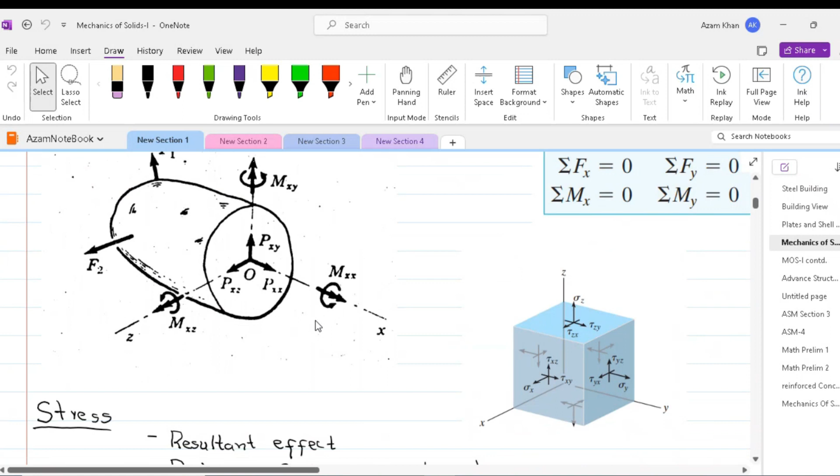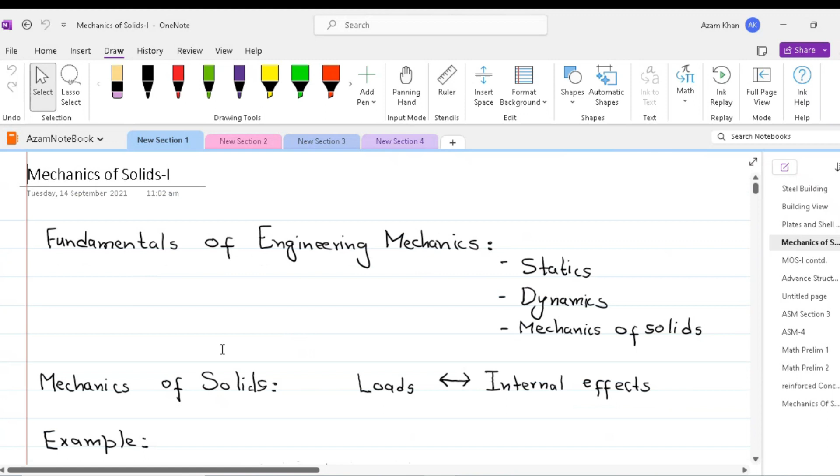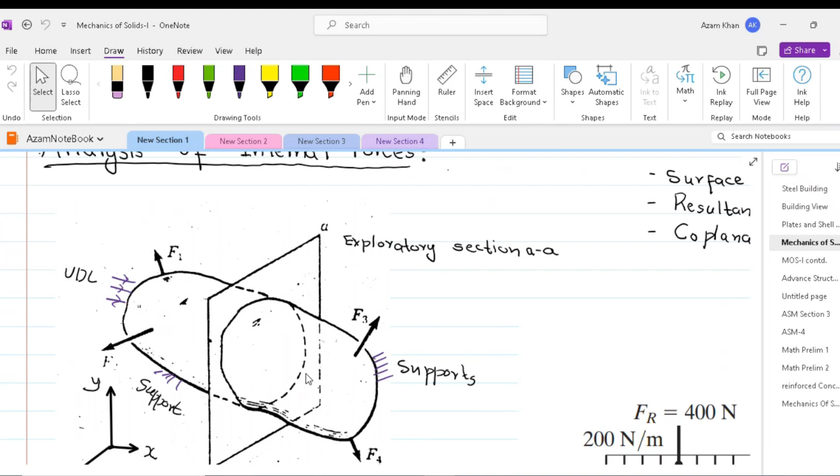In our previous course of Mechanics of Solid 1, we considered a body subject to different types of loading, supported at certain positions with a variety of loads applied. The basic aim was to find the internal behavior of the structure under a single type of loading at a time. In other words, we were trying to find the stresses and strains within a body when subjected to, say, axial load only, torsion load only, or flexure load only.

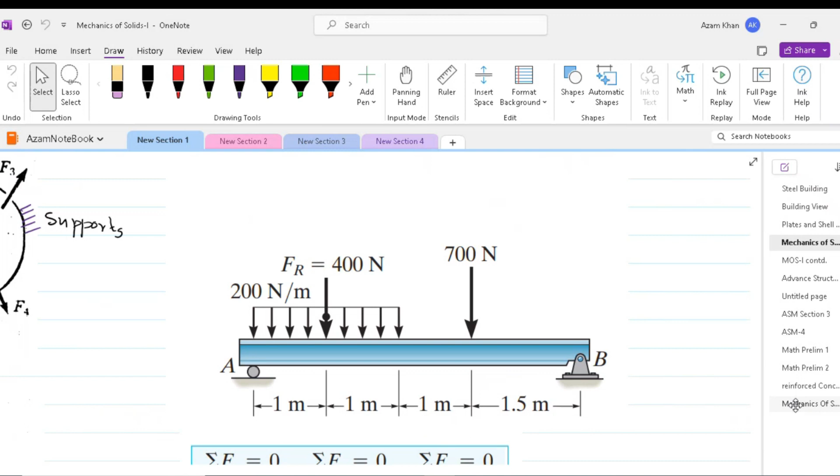In the combined stresses case, we will take a combination of these forces, apply them on a body, and try to find out the stresses. It's important to bear in mind that the stress and strain in our course will be considered elastic, so in Mechanics of Solid 2 we won't exceed the elastic limit.

In combined stresses, we can have two or more types of loading acting simultaneously on a structure. There can be three possible combinations of these loadings: axial and flexural, axial and torsional, and torsional and flexural.

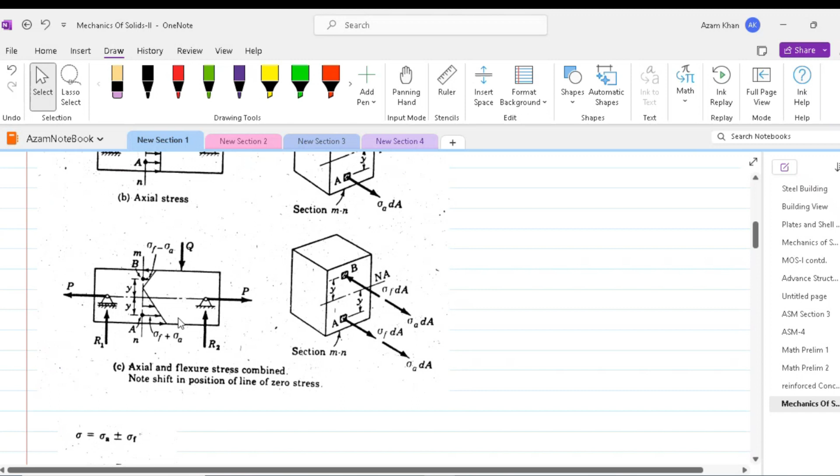Imagine we have a beam subject to flexural load and axial load at the same time. Because of the flexural load, applied perpendicular to the neutral axis, flexural stresses develop in the structure. Due to the simultaneously applied axial load, axial stresses also develop within the structure. In this figure, for convenience, the loads are shown separately, but in reality they act simultaneously on the structure, so the load is broken down into the flexure case and the axial case.

Imagine point A located at some distance from the neutral axis. We are trying to find the effect of both flexure and axial forces at this point, in other words, the stress at point A. It's important to remember that the internal behavior of a structure relates to finding the stresses and strains within it.

At point A, located at distance y from the neutral axis, flexure stress develops, given by sigma f times dA, where dA is the small infinitesimal area at point A. The force developed at point A is tensile, because the region below the neutral axis is under tension. Sigma f would be equal to my over I.

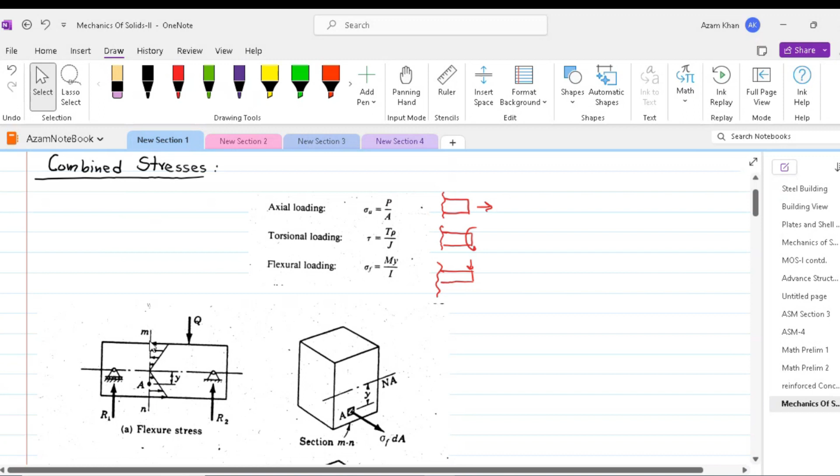The moment for this condition is found by drawing the bending moment diagram and finding the moment at A. This moment varies linearly along the cross section MN, where A is located at distance y. Sigma F, the flexure stress, is the stress at cross section MN. That stress multiplied by the small area around point A gives the tensile force appearing at point A. Similarly, due to the axial forces, axial stress develops at cross section MN.

This axial stress will again be multiplied with dA, and we would find the force at point A due to this axial stress. After finding the force contribution of flexure and axial stress, we can algebraically sum the forces to find the resultant force at point A.

The fact that we can simply add the flexure effect and the axial effect is because we are applying the principle of superposition. This principle tells us that we can linearly add the forces appearing in a particular direction, provided the system is elastic, or in other words, the elastic limit is not surpassed.

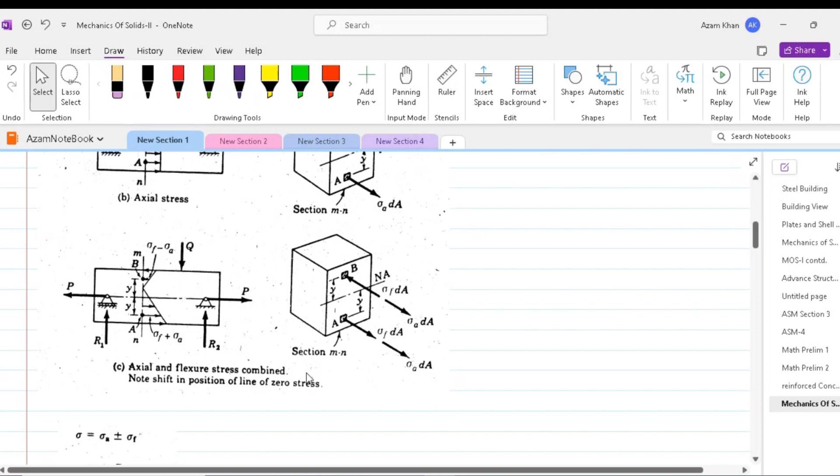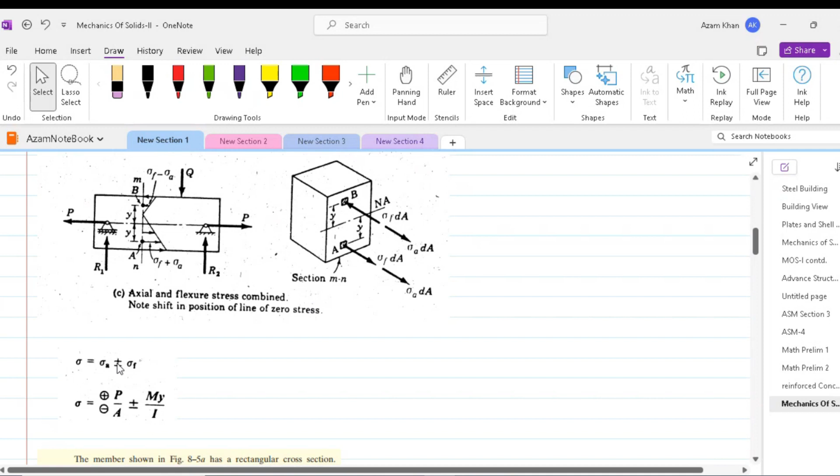Thus, we can write the total stress at any point along the cross section equal to the axial stress contribution plus or minus the flexure stress contribution. So in combined stresses, we have to be very careful about the signs of the load.

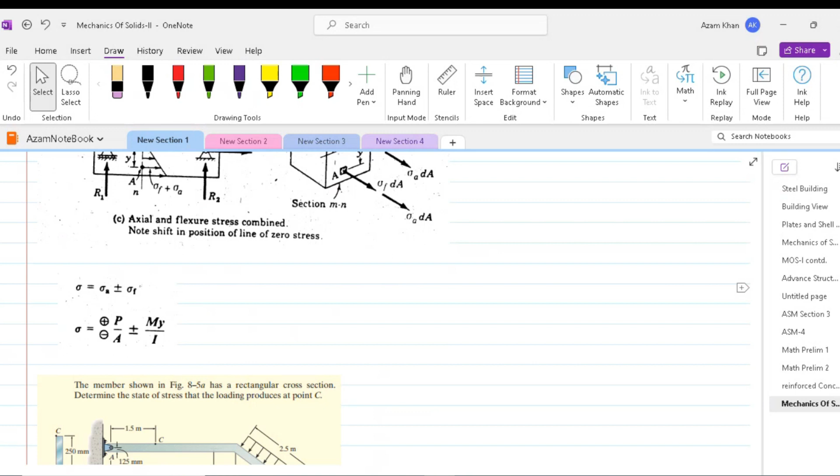If tensile stress is denoted by a positive sign and compressive stress by a negative sign, the resultant stress at any point of the beam would be plus or minus P over A, plus or minus My over I. The reason we have plus or minus P over A with the first term is whether the applied axial load is tension or compression.

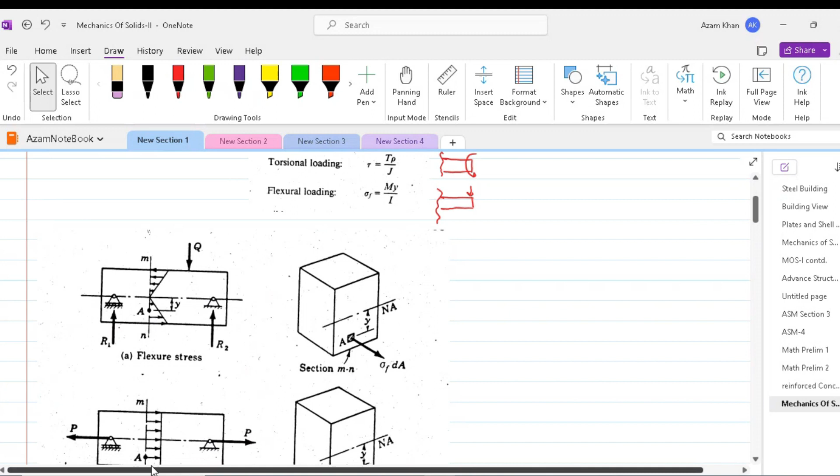The reason we have plus or minus with the flexure term My over I is whether we are below or above the neutral axis. In other words, if the load P and the load due to flexure stresses are in the same direction, the algebraic sum would be positive. However, if they are in opposite directions, we would have a negative sign.

Thus, the circling of these signs is a reminder that the axial stress is uniform and of the same type all over the cross section, whereas the magnitude of the flexure stress varies with position. In the same manner, if we have axial and torsional combined load, torsional and flexural combined load, or axial, torsional, and flexural combined load, we have to apply the same concept as discussed here.

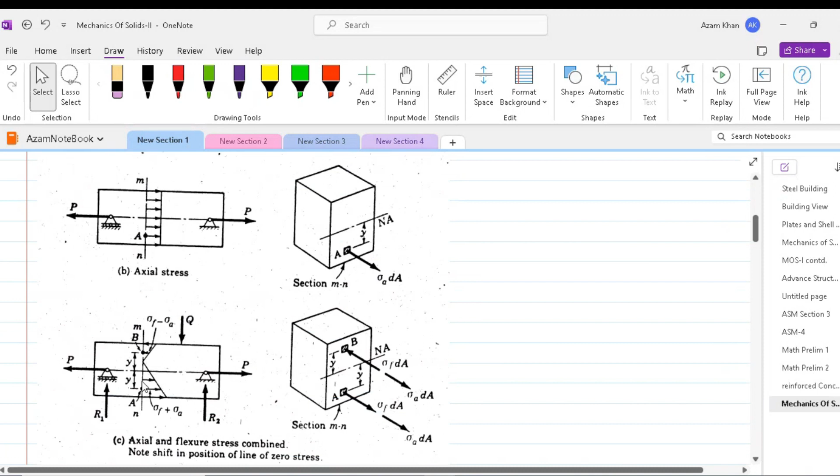We have to make sure whether the forces due to different types of loading are getting added or subtracted. So we will discuss a few examples now to make this concept a bit more clear.

In this problem, we have a member with a straight portion and an oblique portion. The oblique portion is subjected to a load of 50 kilonewton per meter and is 2.5 meters long. The straight portion is 4 meters without any loading. We are asked to find the state of stress at point C.

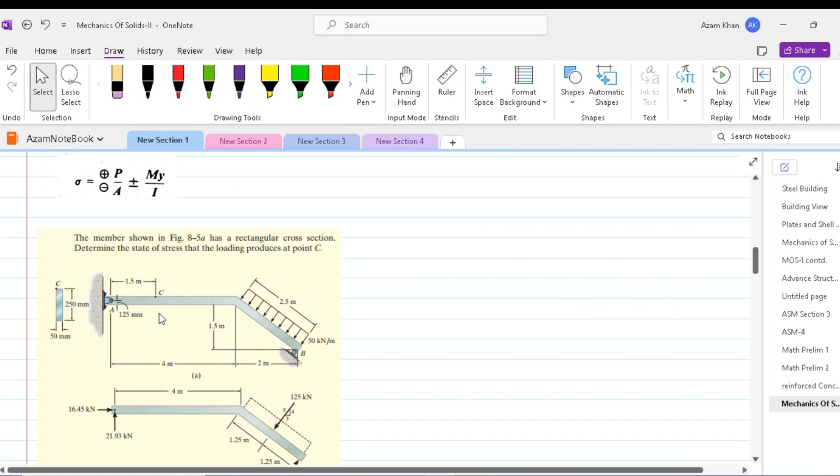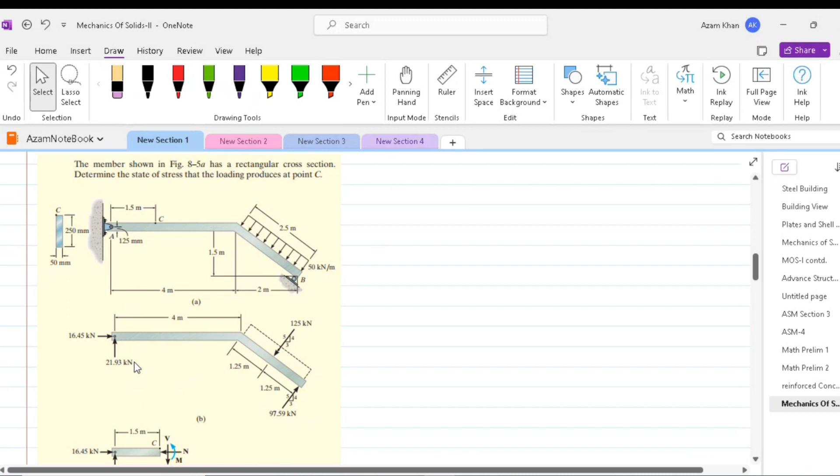As discussed previously, we first have to find the reactions at A and B. Please note that at A we have a hinge connection, and at B we have a roller connection whose resisting force is perpendicular to the longitudinal axis of the oblique member. Now, using equilibrium, we will get these reactions.

So at B, we get 97.59 kilonewton. At A, we get 21.93 kilonewton acting vertically and 16.45 kilonewton acting horizontally.

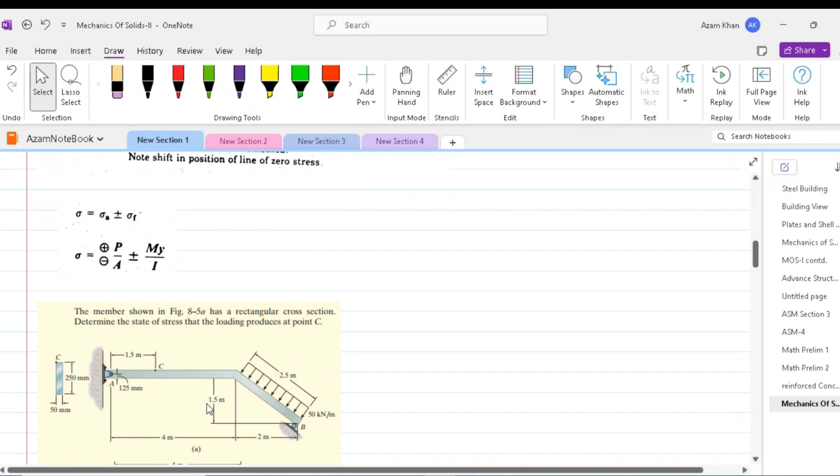In order to find the internal forces at C, we can cut the structure at C, put all the internal effect of the other side, and omit the other side. So the portion of the member on the right hand side will apply shear load V, axial load N, and flexure moment M onto point C. The equilibrium states that the summation of Fx, summation of Fy, and summation of moment of this free body must be equal to zero.

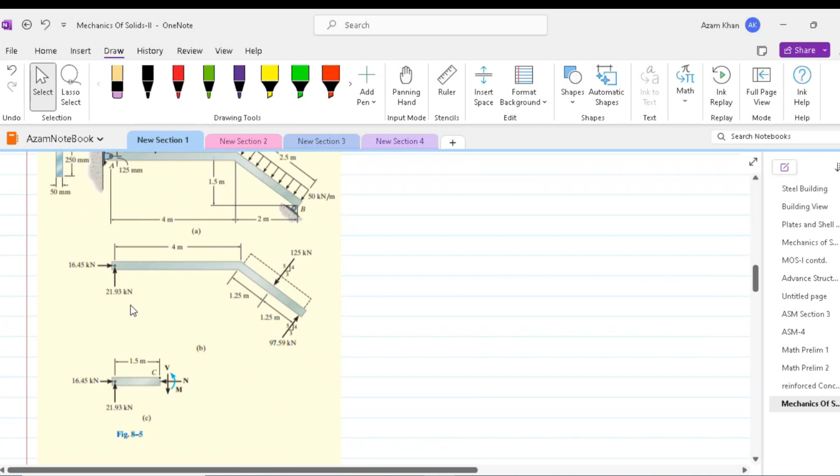Thus, we would get N is equal to 16.45 kilonewton, V is equal to 21.93 kilonewton, and M is equal to 32.89 kilonewton meter. So the normal stress would be determined by dividing this normal force by the area of the cross section, which is already given to us, that is 50 by 250 millimeter.

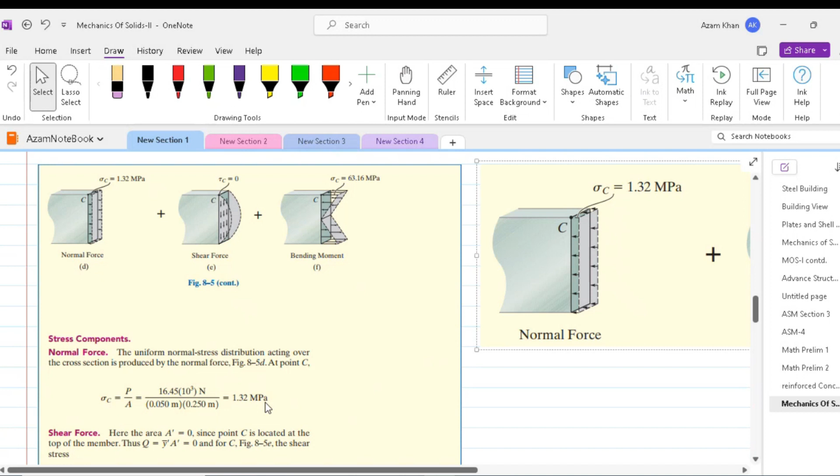So the axial stress will come out to be 1.32 megapascal, which is compression. The shear stress at this cross section will be equal to VQ by IB.

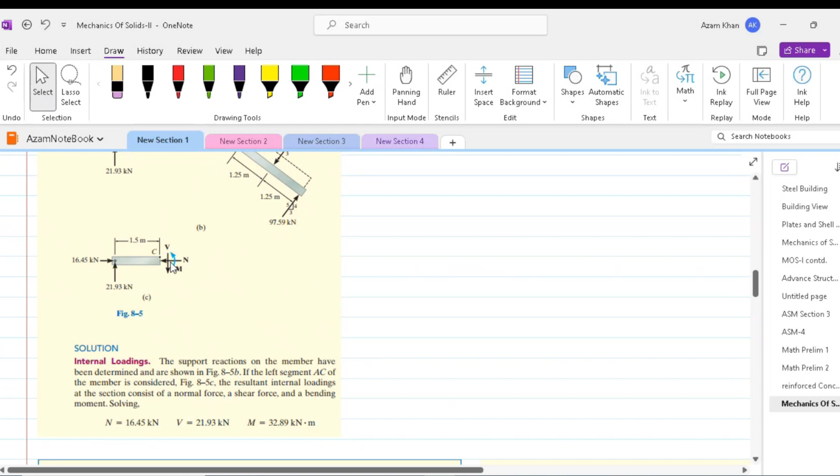However, since we are asked to find the stress at point C, which is located at the top of this member, at this position, the shear is 0. We know from our knowledge of mechanics of solids that the shear at the ends are 0, and then it starts increasing, becomes maximum at the center, then starts reducing and comes again to 0 at the lower end. So shear at point C is equal to 0.

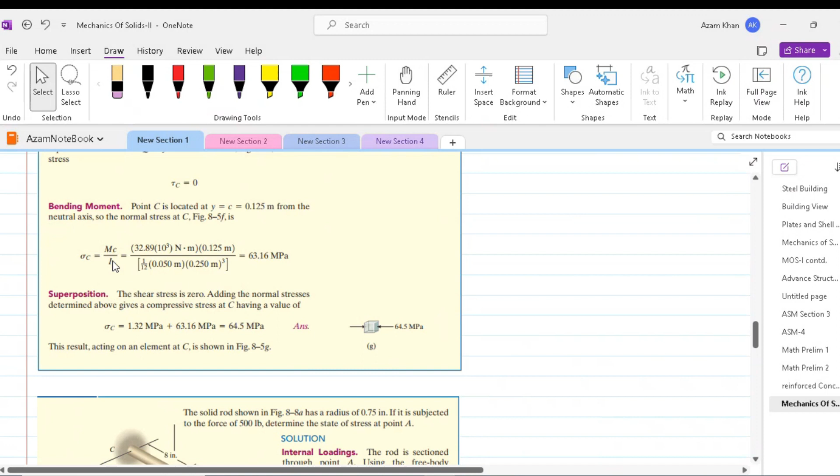The stress at point C would be equal to MY over I. Y would be the maximum distance from the neutral axis to the extreme fiber. Sigma C would be equal to MC over I. I would be moment of inertia, which is bh cubed by 12. C would be the maximum distance, which is 250 millimeter by 2, thus 0.125 meter.

Sigma C will come out to be 63.16 megapascal. In these type of calculations, it is important to take care of units.

If we are using the SI system, we have to convert all the parameters into the SI system. Hence, load is taken in Newton, area is taken in meters. And consistently, in bending moment, we take everything in Newton and meters.

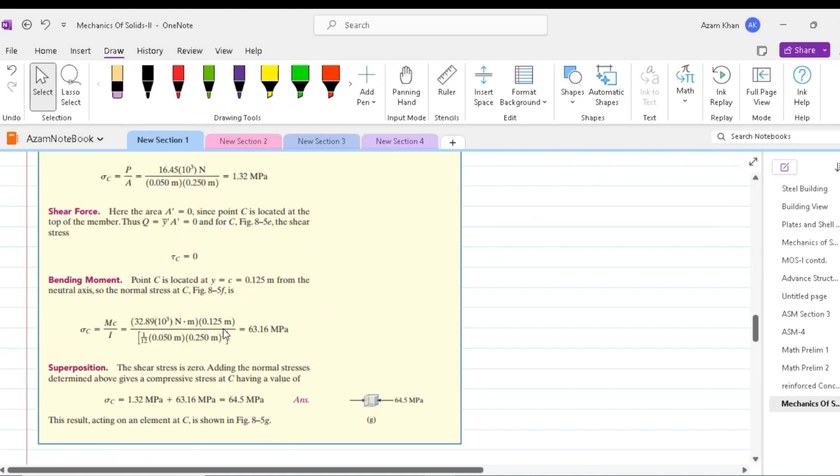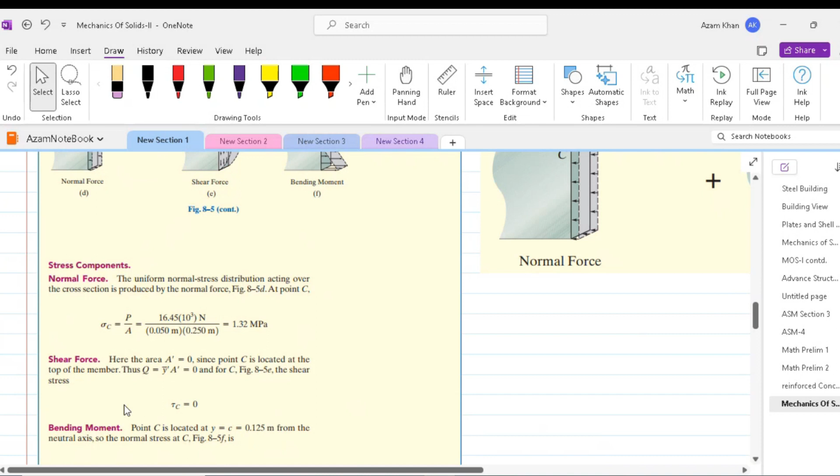Now, at point C, we have sigma C which is 1.32 megapascal, and sigma C 63.16 megapascal. The 1.32 megapascal is coming from the normal force, and 63.16 megapascal is coming from the flexure stress. These two can be added because both are due to the compression load.

Hence, our combined stress will come out to be 64.5 megapascal, and that would be in compression.

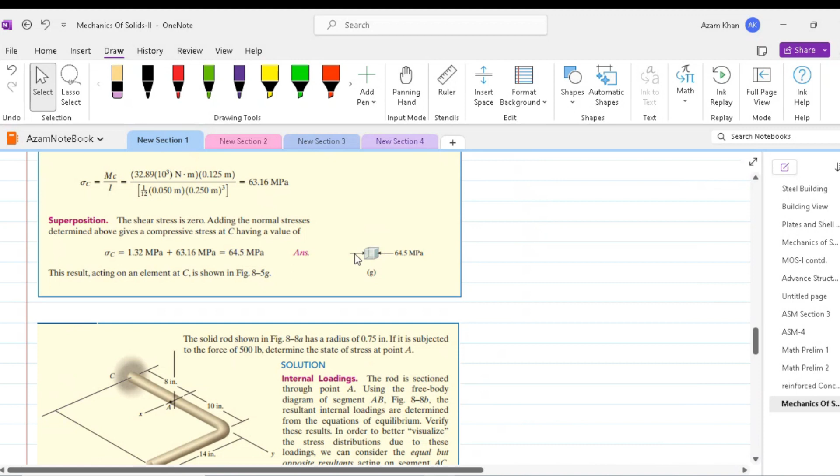Now, let us do this second example where we have got this circular rod which has a force of 500 pounds applied in the y direction. This solid rod has a radius of 0.75 inches and the load is 500 pounds. So we are dealing with US customary units.

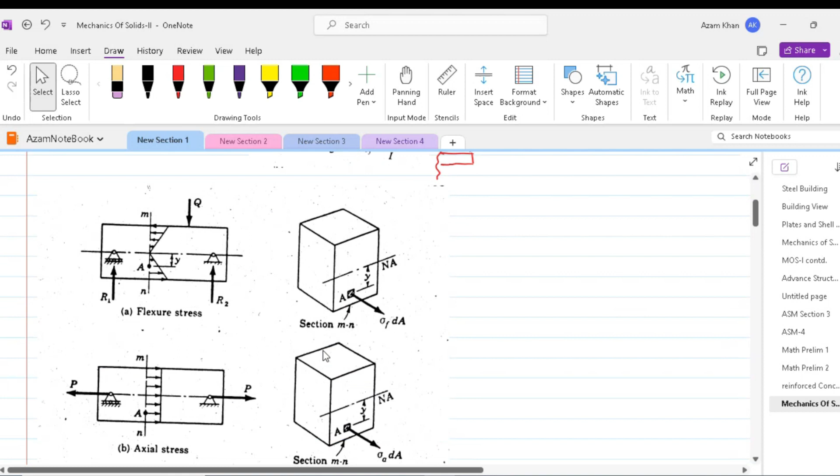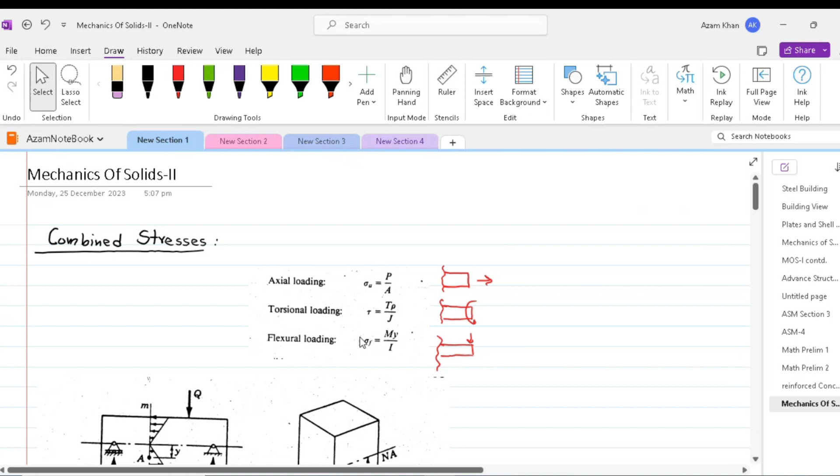We are asked to find out the stresses at point A, and point A is located right at the edge of this circular bar. In these type of questions, we have to first think about what type of loading is applied. Correspondingly, we will find out our stresses and see whether the stresses are getting added, subtracted, or would have no influence at all.

We can appreciate that this 500-pound load will cause axial stresses and flexure stresses at this point. In other words, we can transfer this 500-pound load via a force-couple system to this location. Thus, we can have 500-pound loads applied in equal and opposite directions at the location of this bend.

So these two opposite 500-pound loads will cause a couple and an axial load of 500 pounds. So 500 pounds has to be divided by this cross section in order to get the stress at this point, and that has been done over here: 500 divided by pi r squared. R is the radius given to us. So we would get 283 psi.

Now, the bending moment stress at point A would be equal to MC over I. The moment would be 500 pounds times 14 inches times C, which is 0.75 inch. C is 0.75 inch because A is located at the extreme fiber, and from the neutral axis to the extreme fiber we have 0.75 inches.

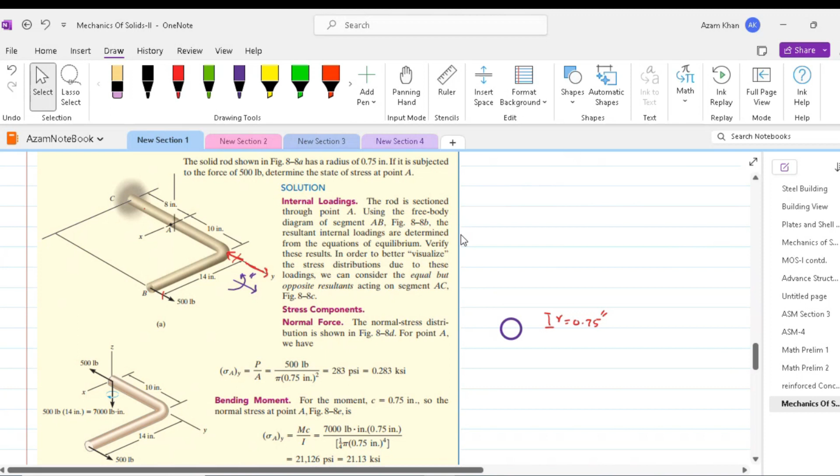I is pi r to the 4th by 4. That is the standard formula for moment of inertia of a solid circular section. We will get the bending stress equal to 21.13 ksi.

Thus, at point A, we have an axial tension stress of 283 psi and a flexure stress of 21,126 psi. And at point A, these both are adding up because they are in the same direction.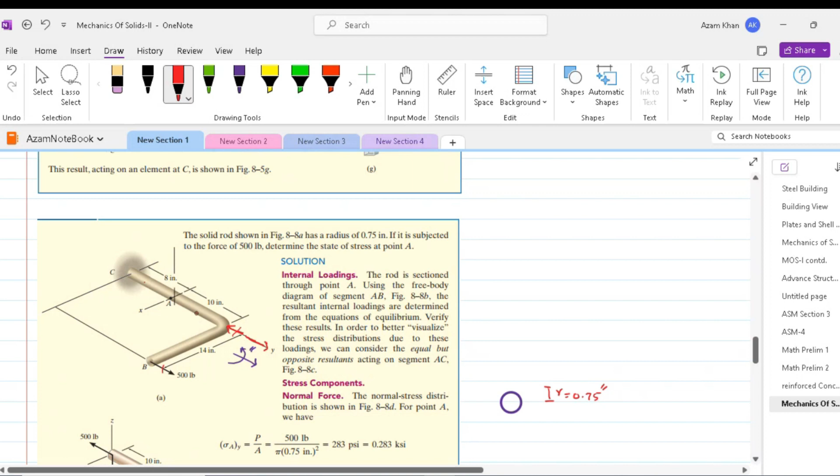As our moment is counterclockwise, hence at point A we would have tension, and opposite to point A we would have compression. These are both added, and we get 21.4 ksi.

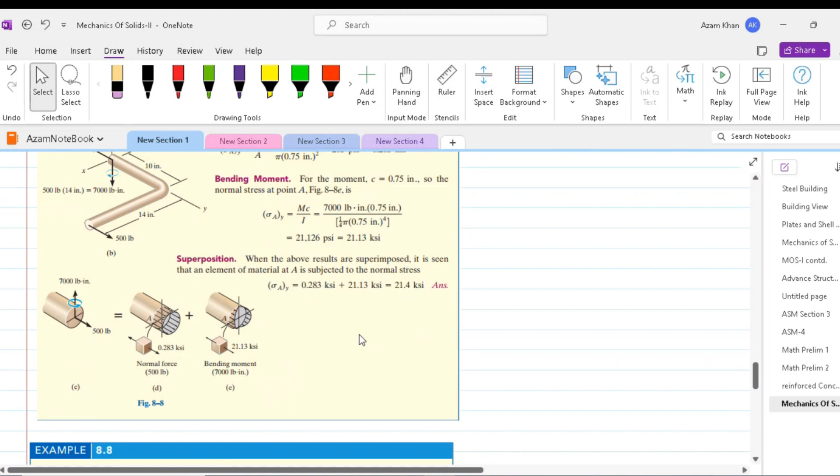Now, if we have the same problem, but this time the load is applied in the vertical direction. Let us dissect this problem and see what type of stresses are developing. Since the load is applied vertically, we would obviously have flexure stresses.

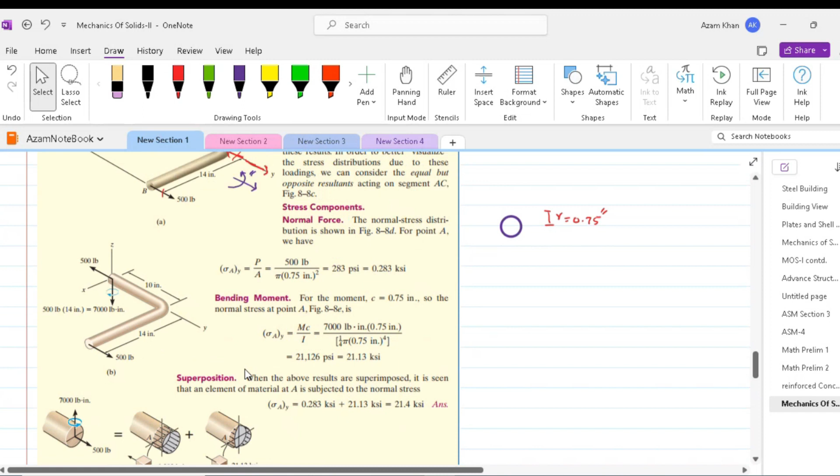For convenience, we can highlight these two components as green and red. The red member is like a cantilever beam. We would have flexure stresses developing at the bent. The top cross section would be in tension and the bottom would be in compression.

We would again use the force couple system to find out the forces at the bent location. So the 800 pound force would be transferred as it is, since previously we had 500 pounds transferred at the bent in the same direction. In addition, we would have a couple causing a counterclockwise moment.

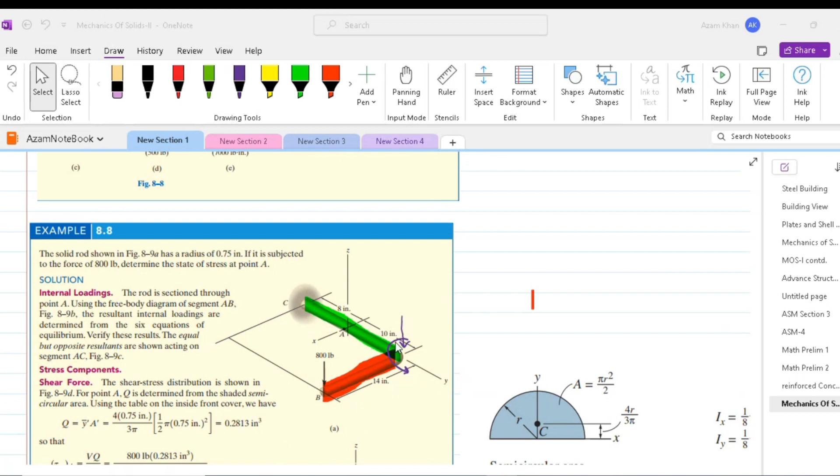The vertical force on the green member will cause flexure stresses at point A, and this couple will cause torsional stresses at point A. In addition, we would have shear stresses also caused at point A due to this vertical load. So essentially, we have flexure stresses, torsional stresses, and shear stresses at point A.

We know from mechanics of solids that tau equals VQ over IT. Q is the first moment of area, which is A times Y bar. A is half pi r squared, and Y bar equals 4r divided by 3 pi.

In order to find out the shear stress at point A, we have to take Q about the center of the circle. Q comes out to be 0.2813 inch cubed.

Now the shear stress equals VQ over IT, where V is 800 pounds, Q is 0.2813 inch cubed, I is pi r to the 4th divided by 4, and T, the width of the region, equals 2 times the radius, or the diameter of the circular section. Plugging in the values, we get tau equal to 0.604 ksi.

The width T is the width of the cross section at the point of interest, and that width equals 2 times the radius. That's why the radius is multiplied by 2. The shear stress comes out to be 604 psi.

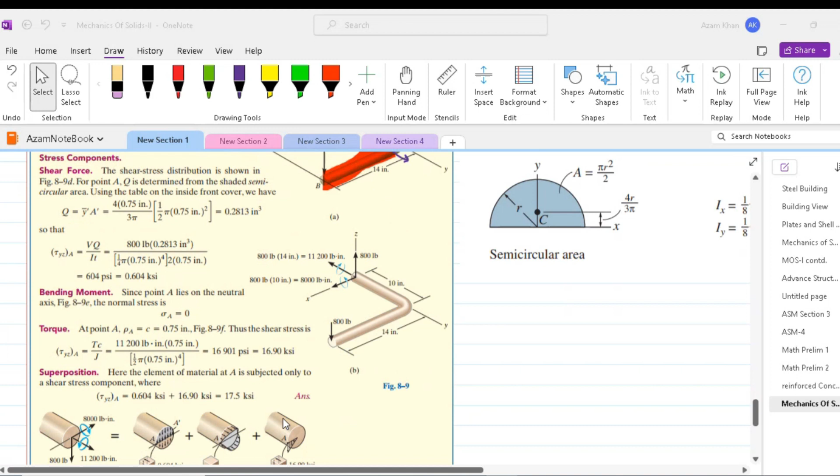So now we have the shear stress, the bending stress, and the torsional stress. The bending stress is 0, so we don't have to worry about it. But we are left with two stresses: the shear stress and the torsional stress.

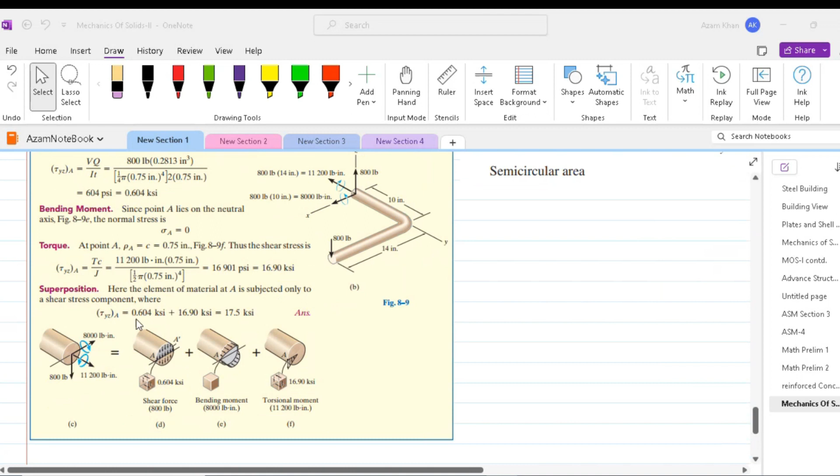If we take a small cube out of point A, we see that at point A we have a shear force facing down, and because of the counterclockwise torque, we would also have a shear force facing down. Hence, these two are additive. Thus, we can add these two stresses and we get 17.5 ksi.

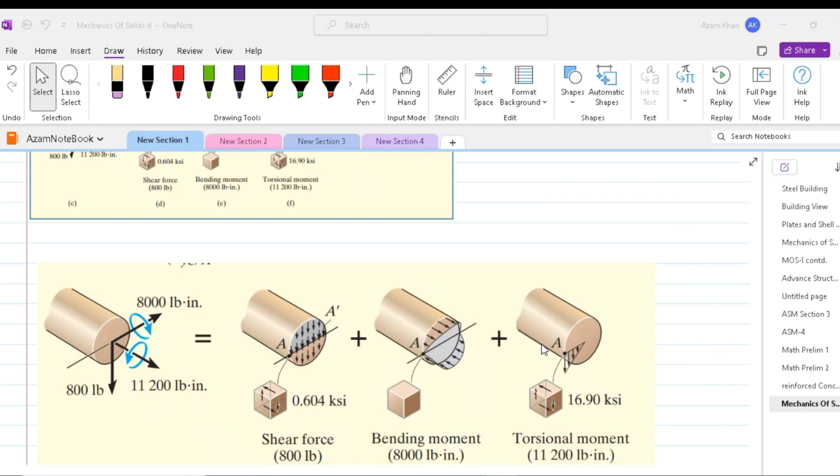Please note that even if we had bending stresses, that wouldn't have contributed to our shear and torsional stress. The reason is that bending stresses are made up of forces normal to the cross section, whereas shear stresses are made up of forces within the plane of the cross section. So therefore, bending stresses in reality wouldn't contribute to the shear stresses.